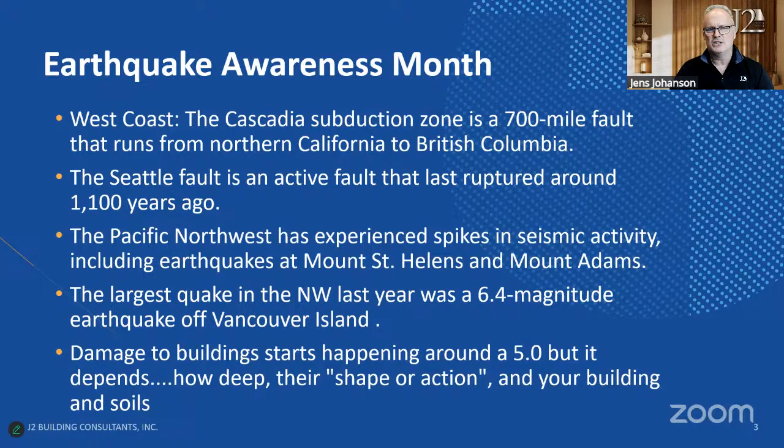The largest quake in the last year was a 6.4 magnitude earthquake off Vancouver Island. Things to think about when you hear about earthquakes in the news: damage to buildings starts happening around a 5.0 magnitude, but it depends, because all earthquakes are different. They can be deep, they can vary in shape, speed, or how up and down they go, and it also depends on your building soils. We'll talk a little bit about that as well.

So here is today's report - they happen every day. This is February 25th's report. We've had 38 earthquakes today throughout the world, with the magnitude ranging from 2.5 to 5.9. This comes off of an interesting source.

This is pnsn.org earthquakes, and you can see the daily earthquake report if you want to. In the Pacific Northwest area, over the last two weeks there have been 179 earthquakes, with the largest at 5.3. So we're starting to get up there a little bit.

This shows you where they're all happening. Bigger ones are referenced by a bigger symbol representing the magnitude. Lots are happening over in California, but you can see this line here - that's the Cascadia line we were talking about earlier.

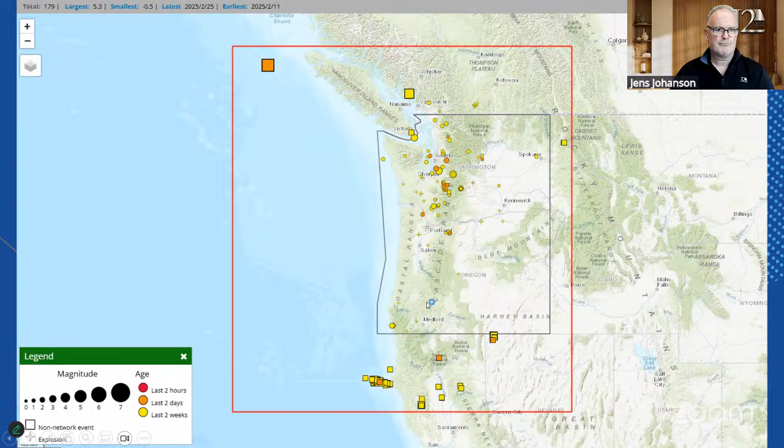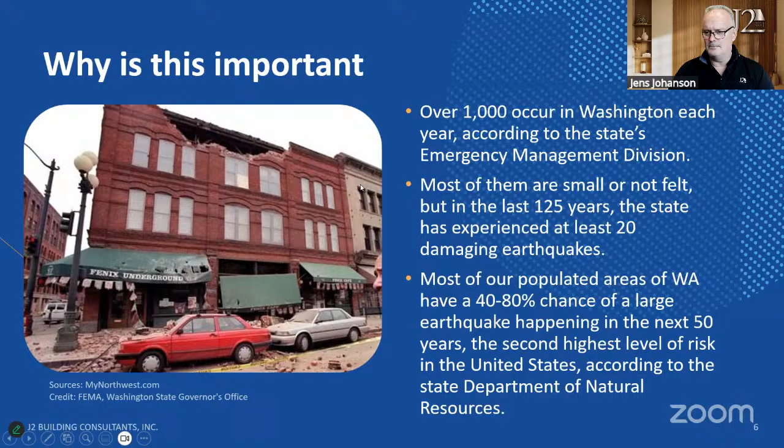But again, the takeaway: look at the reinforcing on the building right next door, probably built almost at the exact same time, and it didn't have damage.

So they're not necessarily increasing, but this is just a pattern. They're always happening, and it's something you need to plan for and think about while running your buildings.

Earthquake terminology - I won't spend too much time on this, but this is the Benioff zone, following the Cascades all the way up into BC. We see here that it kind of lines up with Puget Sound, and that's where we see the damage happening. You get out to the shoreline where you get these subduction quakes - the Juan de Fuca plate and the Pacific plate coming together and having lots of action.

The subduction zones get some bigger earthquakes out here, but they're off the coast a ways - that's what causes the tsunamis. You get the big earthquake, and then you get some tidal action because of that. The Benioff zone has lots of action in the damaging quakes there.

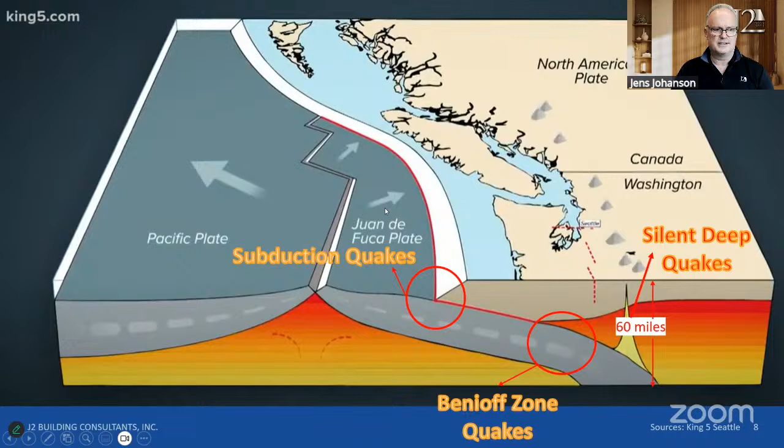Now let's talk about how earthquakes affect the building - we want to think about building materials. Wood frame has some good flex and bend. I'm holding up a piece of wood - I can bend it, it's got resilience. If I bend it too far, it'll snap and break, but we don't see a lot of that in earthquakes where the wood actually breaks in half. We just see a lot of bending, and then the components fall off, so the brick or other things crack.

Steel - here's just a little knife - steel has a lot of flexibility. It can bow, it can bend and not break. But the biggest ones are the masonry, brick, and concrete. Brick has no flexibility - it cracks, right? Even with a little bit of movement, it cracks. So understanding how your building's set up matters.

Think of your building floors like boxes stacked one on top of another. In a shake, we want to keep those boxes together, keep them attached, so we don't end up with one box hanging off that side and another box hanging off the other side. We also want to take that stack of boxes and tie it down to the foundation so it doesn't slip off and tip over.

So we want to tie it to the foundation, tie the boxes together, and tie the roof on top of that, whether it's a sloped roof or a flat roof - tie those things all together. So as we're shaking and even going up and down, the pieces aren't bouncing and moving and shifting. Here's a couple little diagrams.

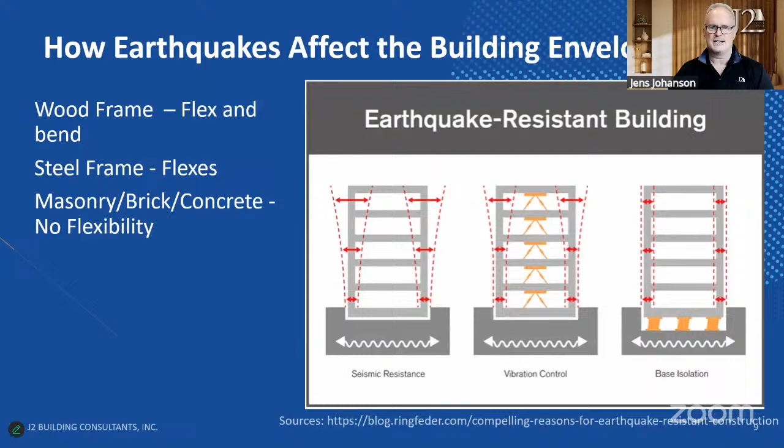Okay, so two reasons for damage: we've got that shaking, and the horizontal, vertical, oscillating, bouncing movement.

But then we also have what comes along with earthquakes, which can be landslides, soil liquefaction, or even tidal waves and flooding. Soil liquefaction occurs when the soil itself is kind of loose and dry, but because of all the shaking, groundwater can come into it, and it turns into jello. You get this real mush feel. So that earthquake may be over and the shaking has stopped, but the foundation starts sinking a little bit, you start leaning. There's often damage that occurs well after the shaking is done.

So these are some things, and you hear stories of the Seattle regrade, where they regraded Seattle to take some of the hills out and smooth it out a little bit. But that fill and compaction can cause soil liquefaction issues if there was a significant earthquake.

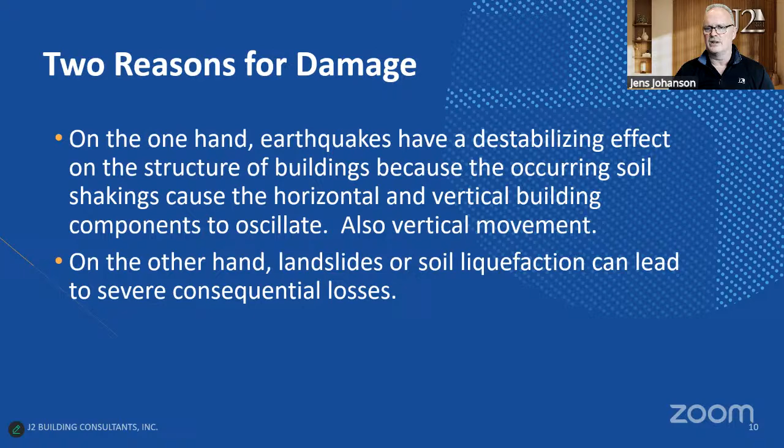Okay, are taller buildings safer? Well, taller buildings can flex more. Remember my longer piece of thing, I could flex it, instead of a shorter 3-story building that's actually more rigid. So these taller towers are actually absorbing a lot of the movement through the flex.

And then you can see this is a San Francisco tower. Down at the base, we have this series of triangle or pyramid type things that really spread out the weight, but make a much stiffer foundation for this tall building. And it's built in San Francisco, so they were thinking about it. But the shorter the building, more engineering work needs to go into it because it's stiffer and it won't move as much.

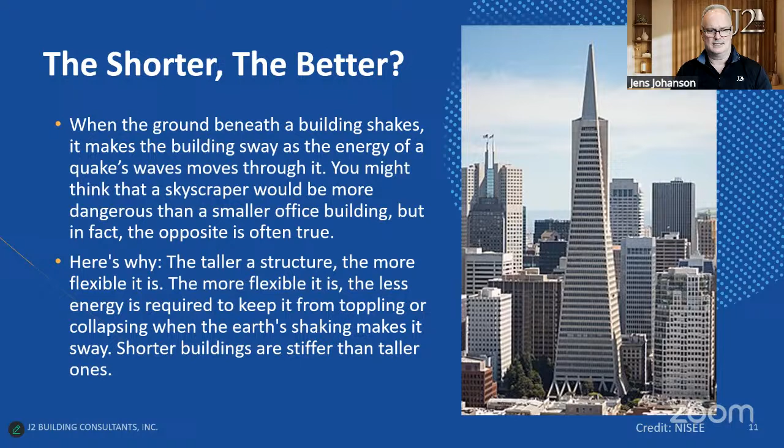Okay, earthquake proofing. Well, I don't know if it can be proofed, but there are kind of 5 things. We can create a flexible foundation. We can counter some of these forces with dampening, some kind of way to dampen the vibration or shake. We can shield the building from vibration, that's those isolators. We can reinforce the building structure, make it stronger, make it attached better. That was that unreinforced masonry where we can attach it. And then we can use earthquake resistant materials, and that's more in new design.

So we're really looking at items 2 and 4: we can do some dampening and reinforce the building structure. We'll get into a few of those slides, but when people come to us and say, 'I want to do some earthquake reinforcing,' it's like, okay, well, there's a few ways to do it and a few of them are expensive. So how far do you want to go? We'll talk about that a little bit too.

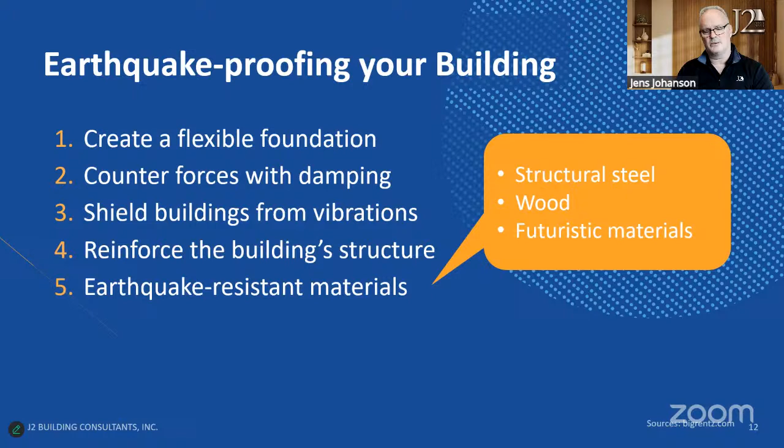Okay, creating a flexible foundation. So this is a little video here. See, these are these isolators. And if I can build from scratch in an earthquake prone area, I can put these isolators below, and the building really isn't moving that much. The ground is moving, but those isolators take up the movement. So we basically have a special foundation that absorbs some of those shakes.

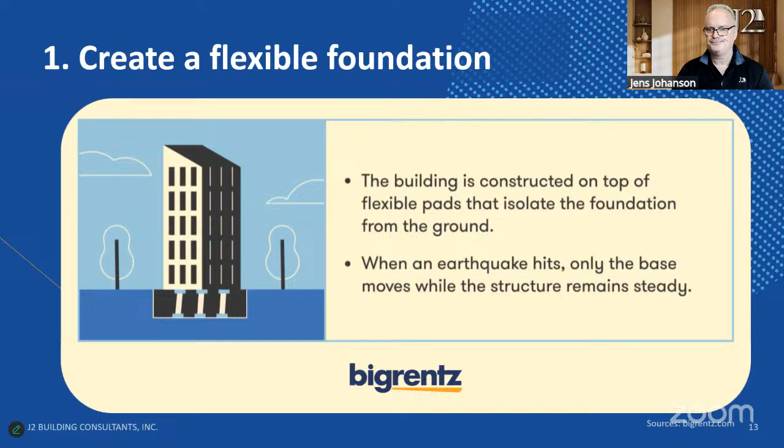Then we can counter these forces with dampening or pendulum equipment. The building's going to move, but hydraulics will actually dampen or dissipate that movement. It's very similar to shock absorbers used in your cars, they kind of help shock or dampen the tire as it goes over the potholes. This type of hydraulic nature will help reduce that.

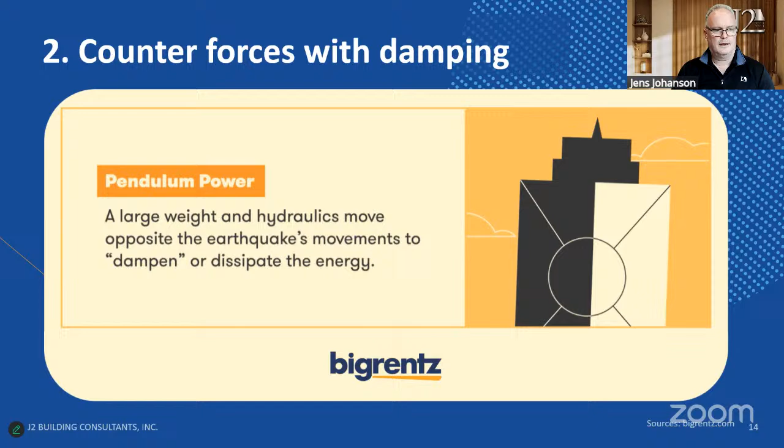And shielding the building from vibrations, more vibrational control. These are dampers and diagonal bracing. So when you've got some hydraulic fluid that slows down the movement and doesn't let it whip out of control, and they're designed to work together, basically they ease the force on the building. This is retrofitting the building, and that's a common way to do that.

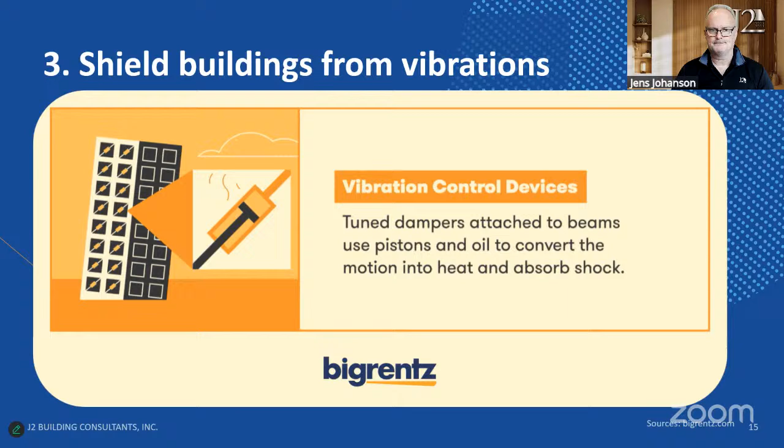This is reinforcing the building structure. If you don't have this, like in older buildings, we would be putting in shear wall, that diagonal bracing, which would keep the structure from turning into a house of cards and just tipping over.

The diaphragm, remember the picture of the roof, the horizontal diaphragm. So again, plywood sheeted, and this shear wall, plywood sheeted, even some diagonal bracing. And then the moment resisting frames, where the floor lines or joists come into the wall, really bolting those two things together and actually letting the studs flex and bend in between those attachments.

Playing this video, you can kind of see how these things move. You can see that moment resisting frame, we're allowing the stud to flex, but the bolt and hardware are keeping it together. So this is really the most common

retrofit. We're doing some diagonal bracing or shear walls. We're putting in additional diaphragms on roofs and floor plates, and then we're reinforcing any place you have these connections with good beams and hardware.

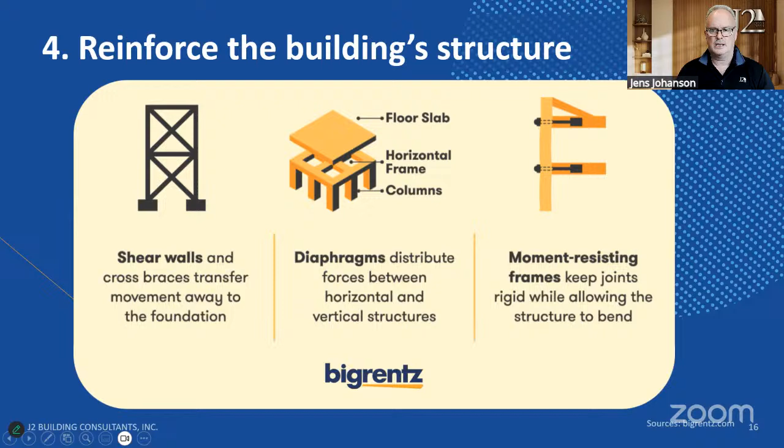And then basically earthquake resistant materials. We talked a little bit about this. Structural steel will allow bending without breaking. It might bend and deform and still be screwed up, but it won't break. Wood, again, has some flexibility. And then you have some fancy materials or original natural bamboo materials, that's why it's a good building source. They can move and allow for movement and not break, unlike brick and unreinforced concrete.

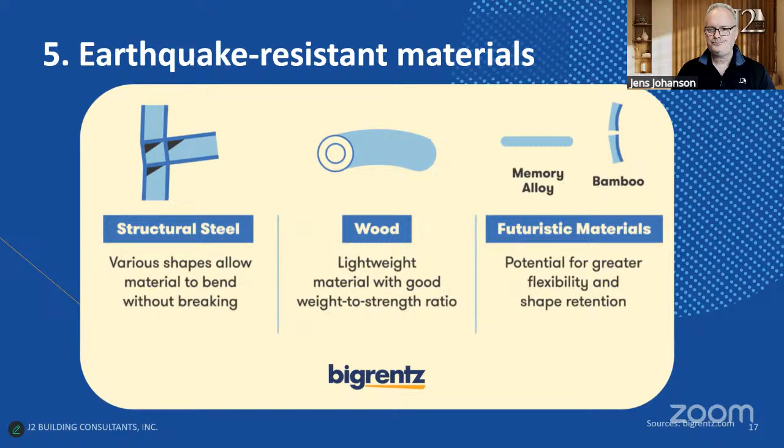Okay, so how seismic forces stress the exterior walls. We're basically talking about cracks, fractures, and even delamination. We can get lateral cracks in stucco, masonry, and siding. You'll get cracking in your interior finishes, and this is where some of the value of your earthquake insurance comes from.

If you have drywall, it's pretty cheap, but if you have plaster, stone, tile, that gets expensive real fast. So again, any kind of tile will crack, just like plaster, stone, or brick. Load-bearing walls may develop big shear wall cracks, diagonal cracks from top to bottom, over 1/8 of an inch.

Seismic movement can cause wall to foundation separation, creating gaps at base plates so things aren't tied down - the boxes aren't connected and the stack of boxes isn't connected to the foundation. And then you can damage pre-existing weaknesses. So if your mortar between your brick is kind of toothed out and crumbly and old, it's really going to get damaged and not provide any good support.

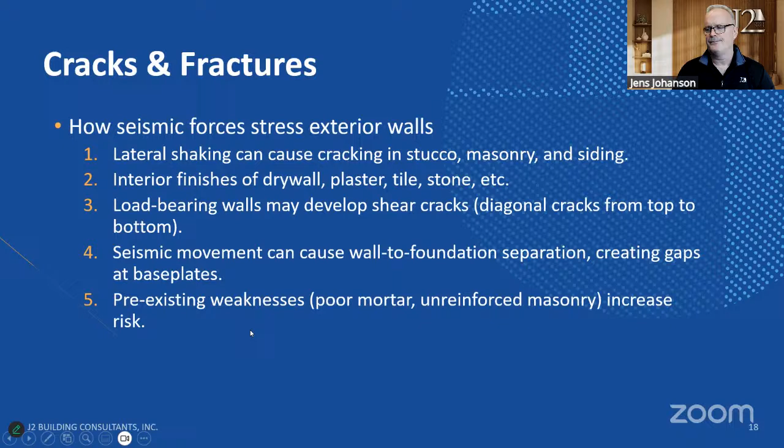And if you have unreinforced masonry, CMU block walls, think like fire stations or schools - there's a lot of the CMU block, the concrete masonry unit, and a lot of brick. And that stuff won't flex.

So before and after, you're going to be inspecting your exterior walls for cracks. You're going to be looking for diagonal cracks near doors and windows, and vertical cracks in stucco. We suggest doing a tap test in the stucco or siding. If it sounds hollow, detachment may have already happened - it might just be hanging on, but it's delaminated, or the attachment has actually failed.

So behind stucco, you have wire mesh that's stapled into the wood. If that's pulled out, that cladding can fall off. You want to check your brick and masonry for loose sections. If the mortar's crumbling, the wall may need to be repointed or even braced.

You want to seal small cracks immediately. You don't want extra water to get in there and cause more freeze thaw damage. And then if you have major cracks bigger than 1/8 of an inch or growing, call in an expert and have a structural assessment.

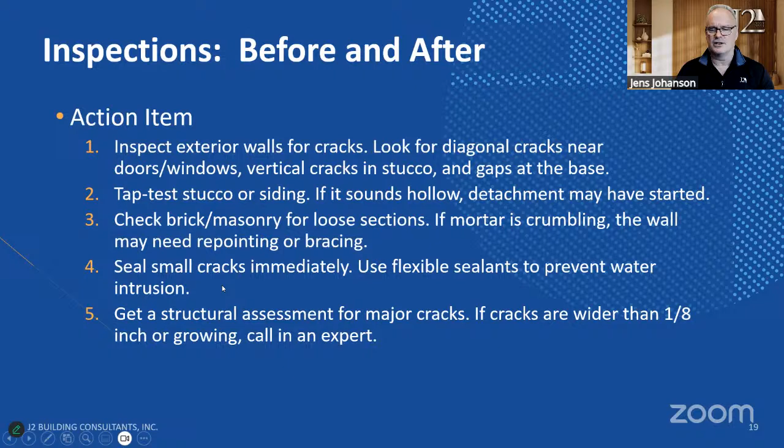Windows and doors. Misalignment happens. So my wall where I have a square window kind of turns into a trapezoid, or my floor to wall experiences some up and down, and now the doors don't open. They hit the flooring and they didn't used to. So we'll get some kind of movement on those door or window frame openings.

We may have some pressure from stress, which may jam some doors and cause windows to stick. The glass can break, or the frame and the glazing unit, the IGU, actually twists and can even pop the insulated glazing unit. That results in fogged panes when moisture gets in between the panes because the window pane has gone under distortion and cracked. So maybe the glass isn't broken, but all of a sudden after the earthquake, all my window panes are fogged up — that's from a lot of movement on the windows.

Look for that. Weak anchoring or weak attachment to the windows can actually cause them to pop out of the frame. What do I mean by that? Retrofit windows where the nail fin's been cut off and caulked in place — you're lucky if you have a nail in each corner. They're designed to be attached every 4 to 6 inches around the perimeter, with lots of fasteners, not just 4. So that window can actually pop out of its opening or get loose. You want to be checking those things.

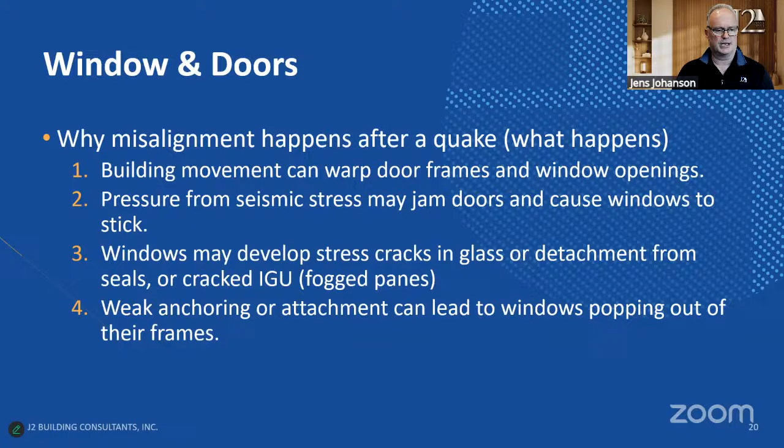Again, before and after. Before, test all your exterior doors and windows, and if they don't operate smoothly, fix them. After the quake, if they don't operate smoothly, things may have shifted. You're going to be looking for glass damage, but it might be the weather stripping and sealants that have failed, letting water in, or those thermal units can fog.

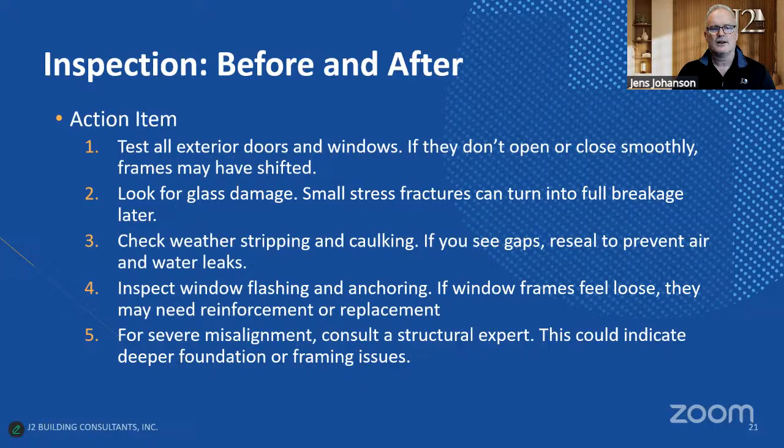Again, window flashing and anchoring — if they feel loose, they are. So you might need to reinforce them or replace them. And if you have serious issues where things are a triangle that used to be a square, call in an engineer and have a greater evaluation done.

Roof and waterproofing damage. Remember our first picture, the wall had fallen off and took half the roof with it. That type of damage can damage the roof membranes — they can rip, they can tear, they can cause sealant failures. That shaking can dislodge tiles and shingles and parapets, creating fall hazards and holes in the roof. The vibrations can crack coatings and roof membranes, so make sure you inspect after, looking for places where water can get in where it couldn't before.

And then also check drainage systems. We'll see downspout lines get dislodged or blocked underneath the ground because of ground shifting, and things don't quite work like they used to — they didn't drain like they used to. Now we have standing water and maybe a bigger problem on our hands.

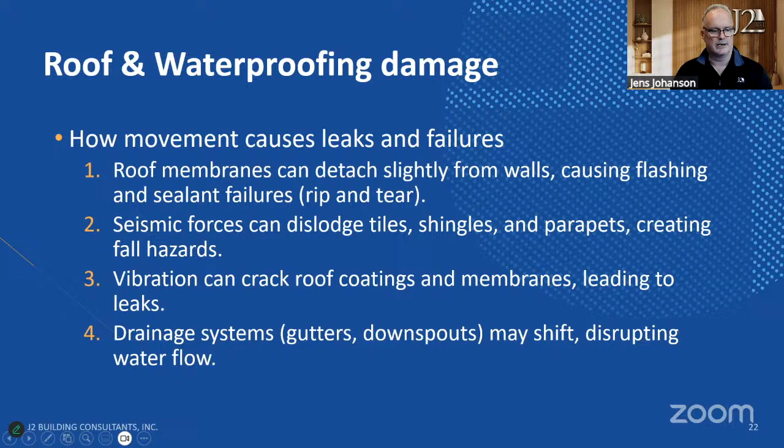Inspect the roof edges and flashings, look for lifted tile, check your roof membranes and coatings, look for missing shingles, inspect all your parapets and roof mounted equipment. You might have some HVAC equipment up on the roof that wasn't bolted down right and fell off. A lot of those things have gas — they're gas powered.

So if we have some shifting up there, make sure you check the gas lines. Check the electrical connections — obviously, if the unit tipped over, it probably ripped the wires out and might be an electrical hazard. And then we're checking those drain lines.

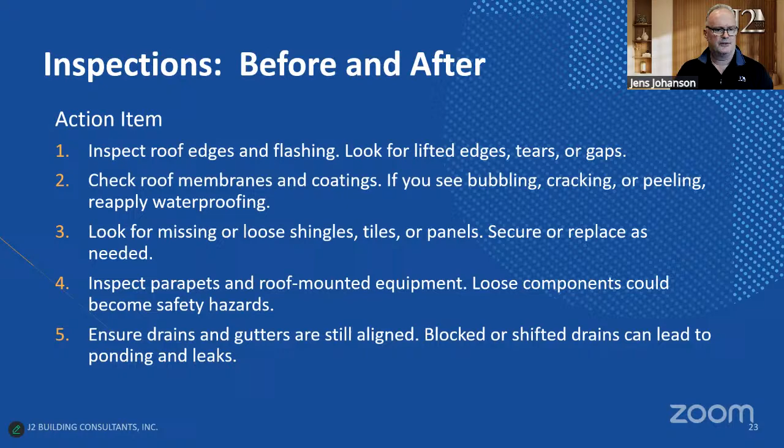Cosmetic damage — we're talking about small stucco and drywall cracks, minor mortar separation in the brick and stone, paint chipping and bubbling. That's a small earthquake, we got some issues, we got to deal with it. It's going to cost money. We'll get into that insurance coverage later.

Obviously, structural damage is really urgent. We've got big cracks, diagonal stair step patterns, gaps at the roof to wall or wall to foundation areas, windows or doors that won't open. I can't get out of the unit — maybe people are locked inside, or stuff doesn't work.

Obviously, look for visible tilting or collapsing, whether in the walls or floors or anything like that. And if you have exterior masonry like brick, is it unreinforced? I've literally been able to push on the wall and see it just kind of move. It's like, whoa, this is going to fall over either under its own weight or with an aftershock. It's done. So really make sure you look around.

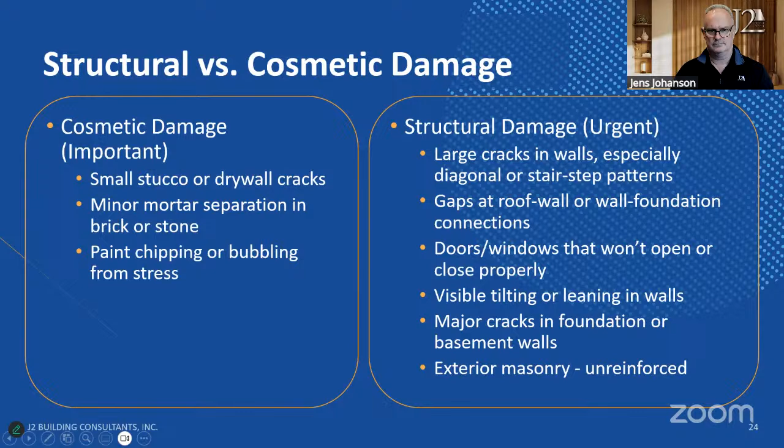So before and after, make sure you document everything, take photos immediately, monitor for worsening conditions. A lot of that damage continues — the building has shifted, the soil maybe has changed, the weight, the building hasn't fallen over, but it's cracking, it's making noise, it's groaning. So we want to document all that and capture it, and seal any minor cracks to keep the water out.

Obviously triaging or prioritizing structural problems. And then, making sure, again, we've talked about water intrusion after an earthquake. A quake can cause secondary damage.

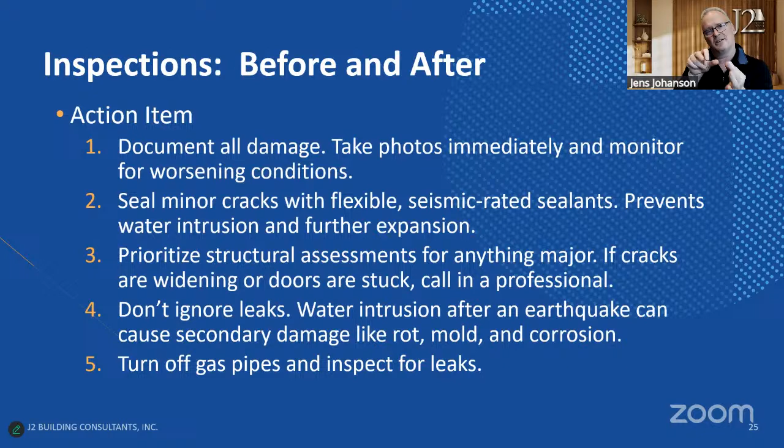One thing I mentioned a little bit: turn off your gas pipes, turn off your gas main right after the earthquake. If you go out to your gas main, you'll see a kind of square, long knob that you can grab onto, and you can align these two plates - there's a hole in the middle. That's for when you don't pay your gas bill, they twist it and put a padlock through it so you can't turn your gas back on until you pay your bill. That's how you know it's off.

And then you can smell natural gas - it smells like rotten eggs. So you can walk around the building and think, what smells in here? I might have a gas leak. I've got to call the gas company. We've got to check that out.

Any kind of wrench, a crescent wrench, will do it. They make special plastic wrenches so there's no static electricity. Having that wrench wired to your gas main, so you know where it is, you can grab it and quickly turn the gas off in case of an emergency.

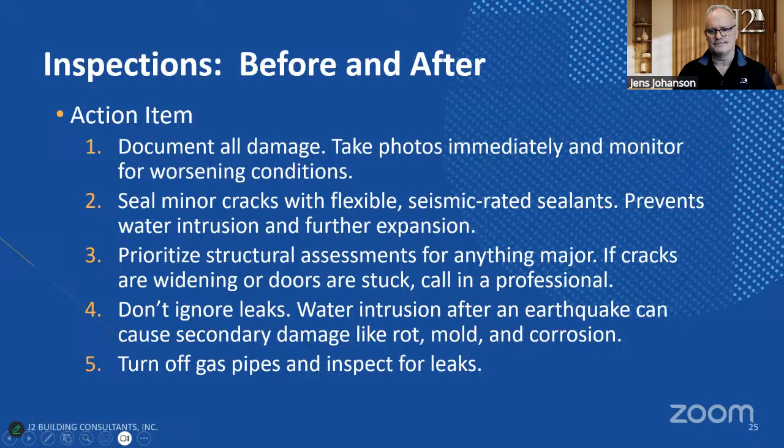For preventative measures, we're obviously inspecting again, strengthening any problems, ensuring we don't have any water leaks, and checking things like fireplaces, chimneys, and brick facades.

So back to our 5-story wood frame condominium, or 1-story, 2-story, 3-story, whatever - it's wood frame, it's probably done okay. It's flexed, it may have shaken a little bit. It might have drywall cracks.

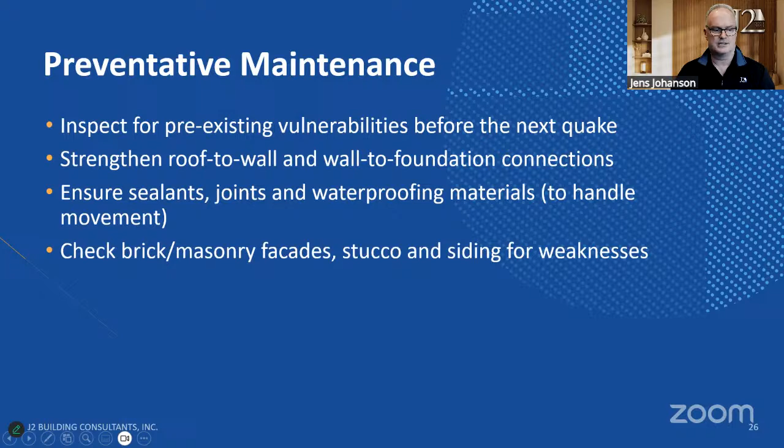But it's those masonry chimneys or any kind of stone cladding out front - is that falling off? Is that having issues? And of course, if I live in an older part of town with lots of brick buildings, I'm really concerned about the brick. So again, just making sure we're taking care of it and making sure things are properly maintained, the masonry is in good shape, etc.

So over to the retrofitting. We'll talk a little bit about: hey, I've got an old building, I want to retrofit - what do I do? So bracing and strengthening - we're probably not going to dig under your foundation and put in those fancy isolators, but we want to really pay attention to unreinforced masonry.

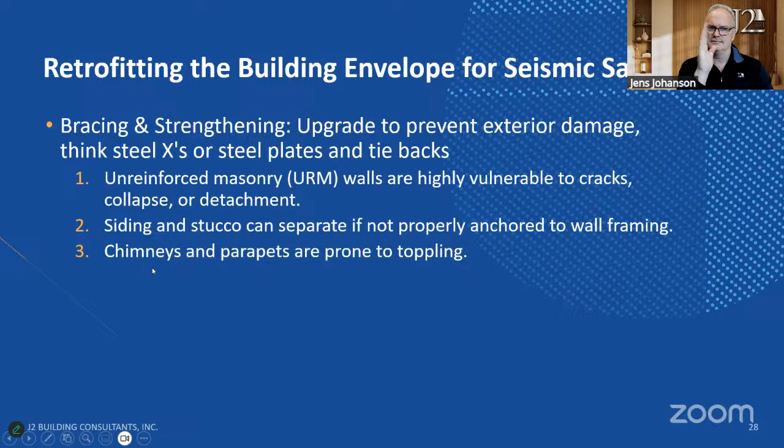Stucco or some kind of concrete, and then chimneys and parapets. Parapets are the portion - if your roof is here, it's that wall that comes up about 3 feet to give you protection when you're on the roof so you don't fall off, but it makes a nice part of the facade of your building. We want to make sure that isn't loose and flapping.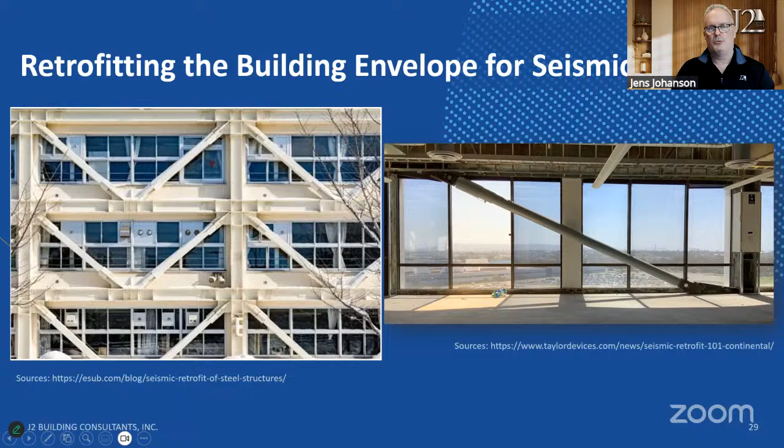But the most common way is, again, in these brick buildings, here's these washers or plates - they call them plates and bolts - but they go back through the building to a big bracket that's bolted on the beam. These plates just give this whole brick wall some stability. They'll be small washers, they'll be bigger, dinner plate size, and they can even be 2x2 plates or even steel bands. If we're trying to design it, we're going to design it so it looks aesthetically nice.

Or maybe these washers are more ornate. They look like some kind of coin, with a little pattern to them instead of just a steel washer that rusts. But what these brackets do is keep the brick from falling off. So on the inside, here's our old wood, plaster, concrete, but you can see the red iron or steel, big steel brackets bolted in to really tie the structure together.

And if we can't do that, then we'll be doing some of these brackets, kind of like a little Tinker Toy set. Then we have to enclose that into drywall to protect it, but also kind of hide it. So now you have some funny little bump outs or columns, but your steel brackets and seismic retrofit stuff is in there. You can Google 'earthquake seismic retrofitting' and you'll see all these things, but this is what we're talking about.

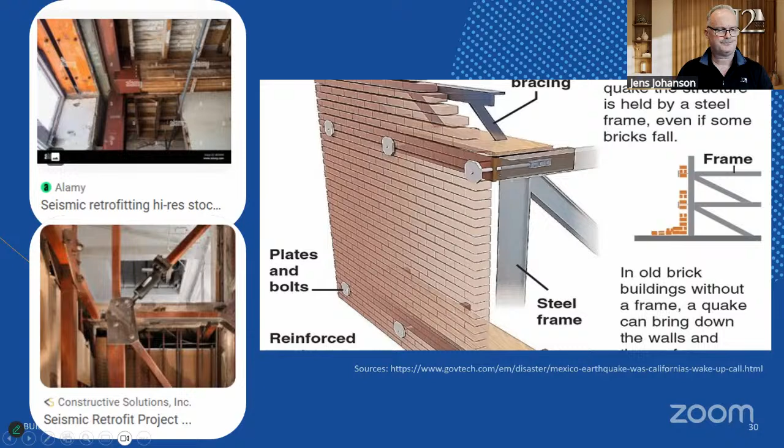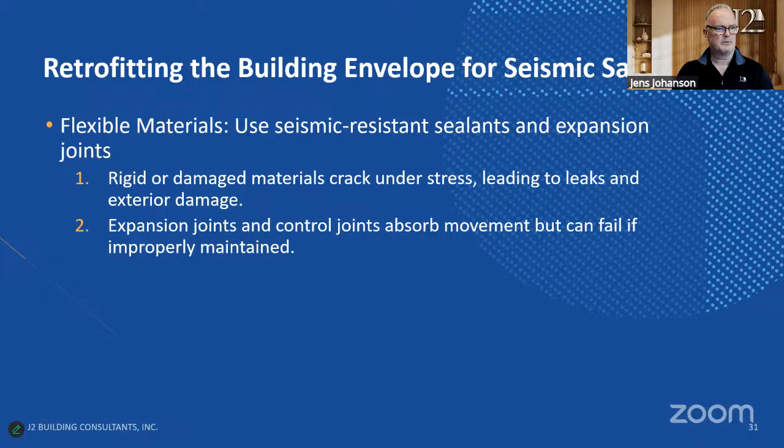Flexible materials is one more thing we're talking about here - sealant and expansion joints, giving your building a little bit of a rubber bumper and weather stripping to move well. Expansion joints can control movement, but they need to be maintained. It's one more thing to do to keep the water out.

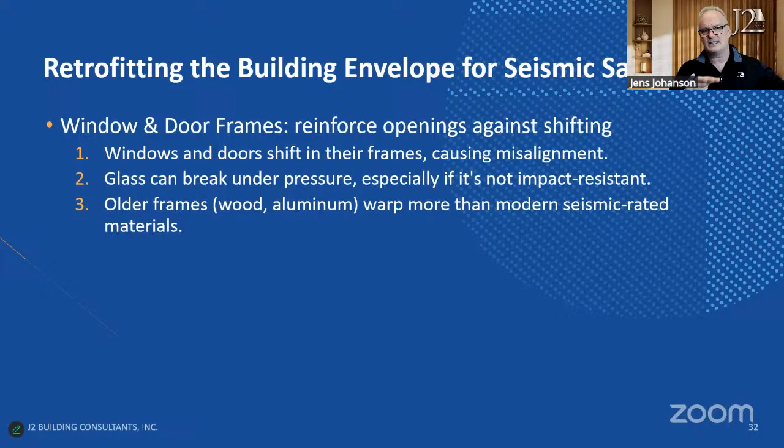So retrofitting for doors and windows. We kind of talked about this, but you really want to be focused on the older frames, the older wood or aluminum - think older buildings, historic part of town, brick and wood frame windows. The wood tends to break and warp and all that stuff. Instead, metal or vinyl plastic would have a nice bend to it as well.

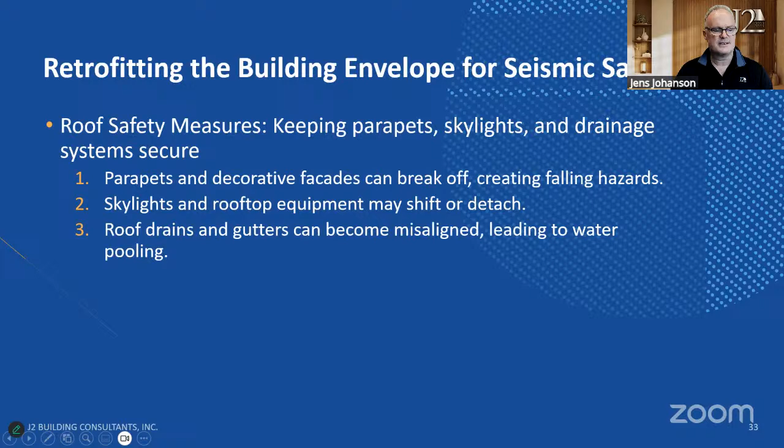Then the roof safety measures - don't forget about skylights, rooftop equipment, we talked about that. The parapets and decorative facades, things like that - just keeping those in good shape.

Post-earthquake repairs - we're going to be kind of triaging lots of damage, just cracks, and then deciding whether we want to call our insurance companies about repair funding. So we're going to talk about that.

Earthquake insurance provides coverage if an earthquake destroys your building or home. It can be a separate endorsement you buy and add to a policy, or a standalone policy. There's also a change of condition policy that may have some earthquake coverage - meaning after the event, was there a change in condition? Yes, my chimney had fallen over - it used to be vertical before the event, now it's horizontal after. That's a change of condition, so you might have some earthquake coverage there.

But what we typically see are deductibles equaling 10 to 25%. And again, all insurance companies are changing things every year, and we see higher and higher deductibles, so make sure we're looking at that.

For math's sake, if you had a 20% deductible on your structure's policy limit - here's where it gets confusing - if I have a $100,000 policy, a 20% deductible is $20,000. That policy won't start paying until I get over $20,000. So I may have a $25 million policy with a 20% deductible - that's a $5 million deductible. $5 million pays for a lot of drywall cracks, right? So we have to look at that and say, is it worth it? This is where you really want help from a broker to understand this.

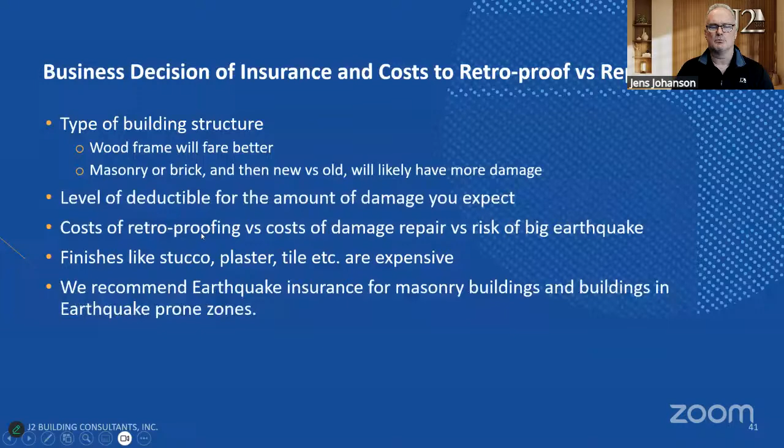So we recommend earthquake insurance for masonry buildings and buildings in earthquake-prone zones. Now you, as a board or group of owners, need to get together and say, what makes sense for us? Let's talk to an insurance rep or broker and see what's happening there.